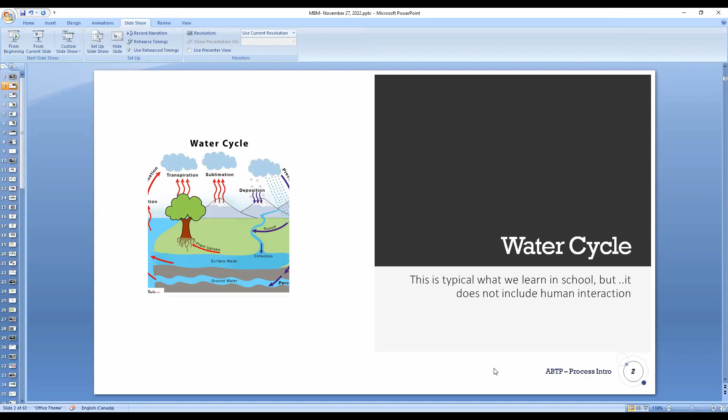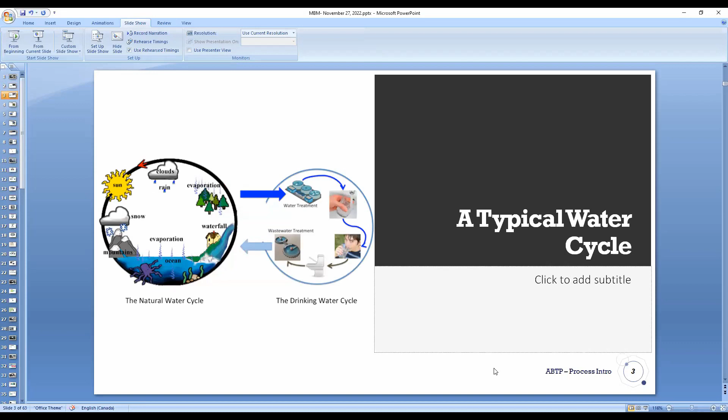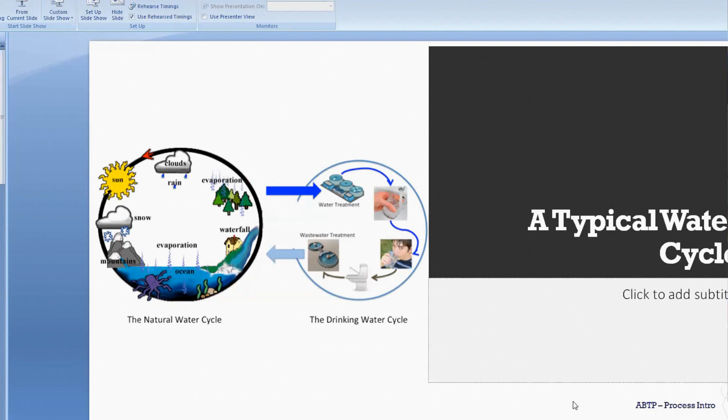And then the human intervention came in, and that human intervention was basically purifying the water and then using it. So you purify the water, you remove the pathogens from the water, you drink it, and then whatever you have consumed, you excrete it, and then it becomes wastewater. And that journey of wastewater continues, because the wastewater gets treated, and that goes back to the lake again.

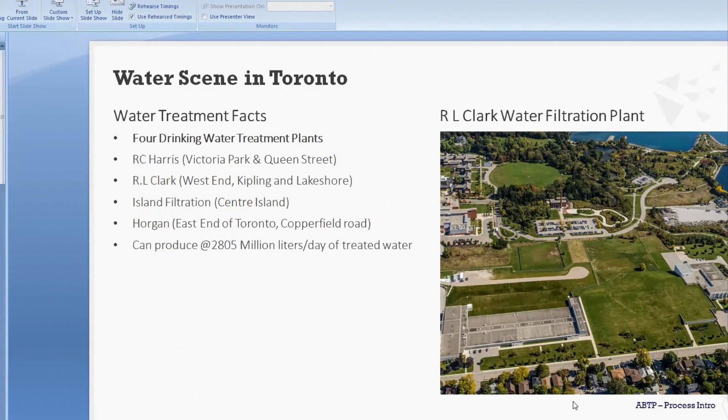So as we live in the city of Toronto, what is the water scene? The city of Toronto is blessed with an abundant supply of sweet water reserve, which is Lake Ontario. And all the water treatment plants in the city of Toronto are along the lake lines. The first is RC Harris, which is at Victoria Park and Queen Street. The second one is RL Clark, on the west end of Toronto. The third one is Island Filtration. The fourth one is at Horgan.

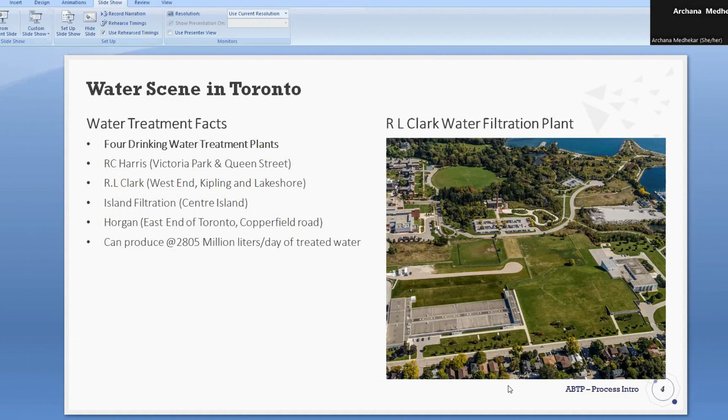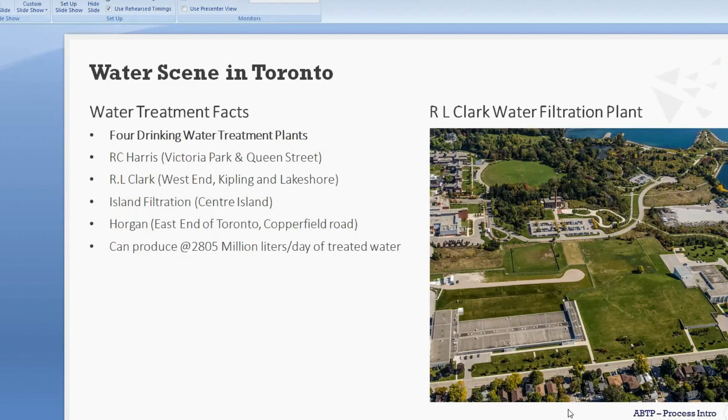The combined treatment capacity of all these water treatment plants is around 2,800 million liters a day. The plants do not produce that amount of water each day, but they are rated to produce that amount by the ministry, because water treatment in Canada is regulated. The ministry issues you a certificate of approval, also called environmental compliance approval, ECA, to produce a certain quantity of water of a certain standard.

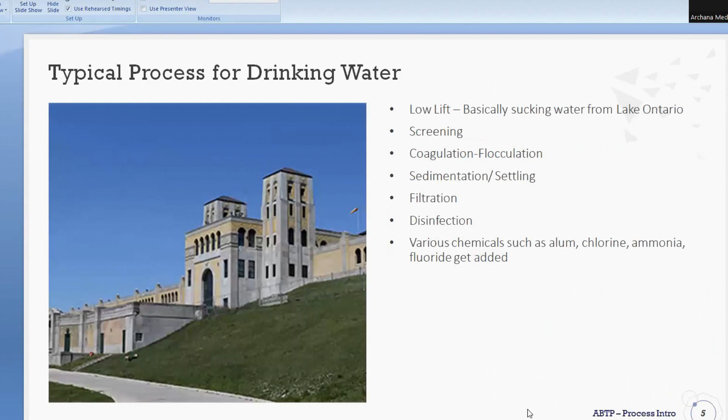So what is the typical process of water? It takes the water from the lake, then you screen it. Water is basically an amalgamation of many ions. So you add some chemical to it, such as alum, which goes through a process of coagulation and flocculation. You're basically destabilizing the ions. Destabilization leads to coalescing of all those particles to form bigger chunks, and those bigger chunks settle down, and that's the process of settling.

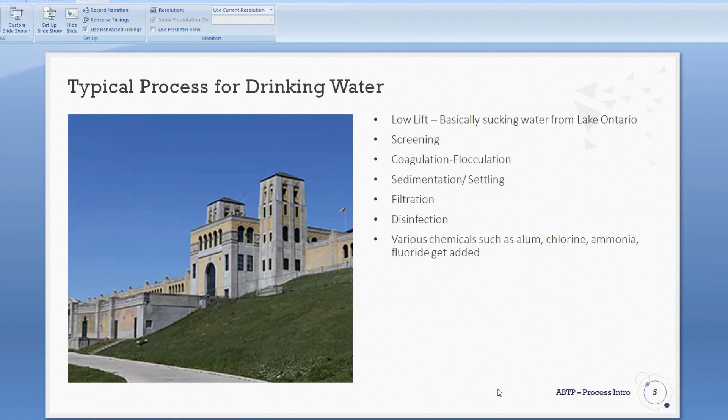Then it goes to a process of filtration, and the filtered water is disinfected because it still has certain pathogens such as E. coli, and then it comes to us through various different lines. In the picture you can see one of the biggest water treatment plants in Canada, the RC Harris treatment plant, on the east end of Toronto.

From that pumping station it goes through a process of screening, which removes the bigger material. What kind of bigger materials? I have seen 2x4s or pieces of tires, or the worst one I have seen so far is somebody dropping in a filing cabinet. Then I have seen bills coming into the wastewater facility, somebody's lost wallet coming into the wastewater facility. So that is called preliminary treatment.

Then it enters the primary treatment. What happens in primary treatment? It contains your pee, your poo, and a lot of water. The poo particularly is what we call solids. The solids basically settle down; that is called sludge. And that sludge is pumped out to a process called a digester. What is a digester? Nothing but a monster stomach.

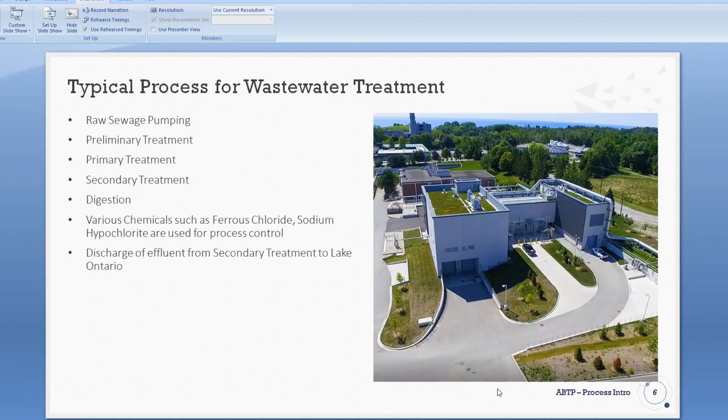And then the water passing over from the primaries goes to secondary treatment, where bacteria eat whatever organics are remaining in the water before sending a very clear product to the lake. So this is a typical process. The effluent from secondary treatment goes straight out to the lake, which is Lake Ontario.

There are, again, 4 wastewater treatment plants in the city of Toronto. One is the Ashbridges Bay treatment plant, at Leslie and Lakeshore, one of the largest. The second one is Highland Creek. The third is Humber treatment plant, on the west end of Toronto. Many of you must have traveled on the Gardiner, around the Queensway area. On the right side, you would see a big green building. That's the Humber wastewater treatment facility.

And the fourth one is North Toronto wastewater treatment plant, which is in the O'Connor Drive area, within the ravines of Don Valley Parkway. Coming on Don Valley Parkway, many of you must have seen a big elephant on the right side. Right within that area there is a wastewater facility, and that is called North Toronto treatment plant. Combined, all these plants treat around 1,544 million liters per day of wastewater.

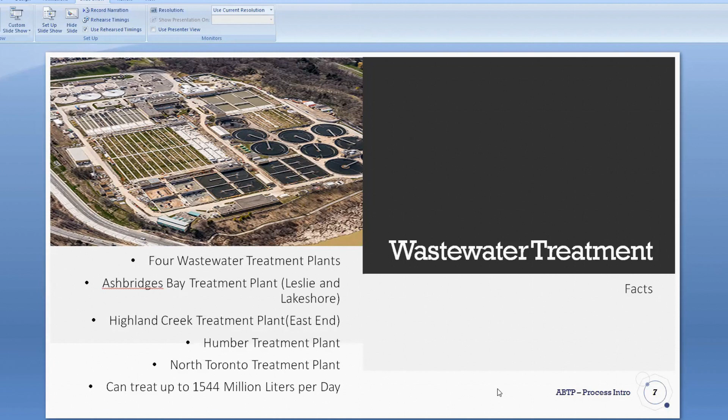So how much do we treat? Ashbridges Bay treatment plant has a sewer shed of around 25,000 hectares. It serves a population of around 1.5 million residents. The rated capacity of the plant is 818 megaliters, and the hydraulic capacity is 3,300 megaliters per day.

Now, all these are big numbers, but how do they relate to you and me, to understand how big they are? Each bathtub in our house holds around 200 liters. The treatment plant, all combined, holds around 5.2 million bathtubs, just to give you the gravity of it. It is also equivalent to 325 Olympic-sized swimming pools. That's the kind of treatment we are talking about.

But do we treat that amount of wastewater each day? Absolutely not. But sometimes we get inundated with water, particularly rainwater or snowmelt, and that's what we call hydraulic capacity. Ashbridges Bay treatment plant is rated for a maximum hydraulic capacity of 3,300 megaliters, which is 3,300 times 1,000,000 liters per day.

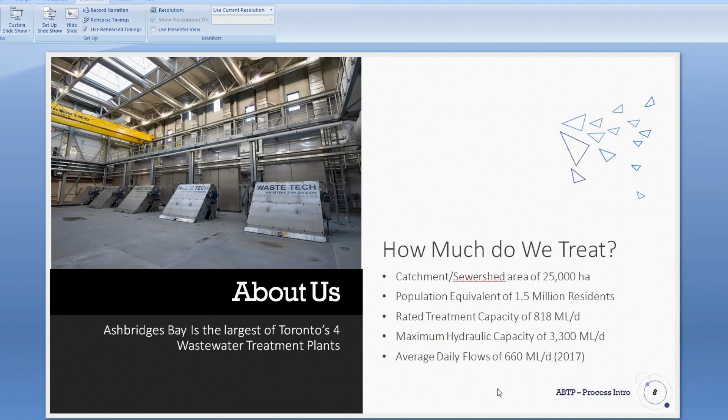The picture you see on the left side is the screening building. That's where all the wastewater first comes in, whatever is pumped, and then it gets screened to go on to the next treatment processes. Ashbridges Bay has multiple raw sewage pumping stations, which I'm going to cover next. So let's talk about it.

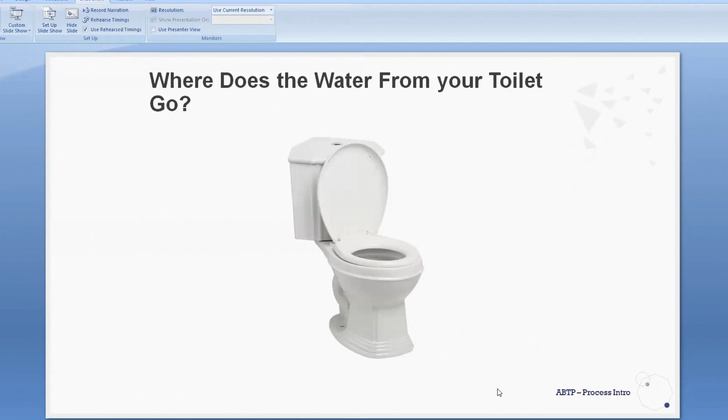As Kaka rightly started, this is the typical toilet we see, and no one wants to talk beyond this point; it's kind of out of sight, out of mind. So, just a bit of history about wastewater treatment. These are the Romans' latrines.

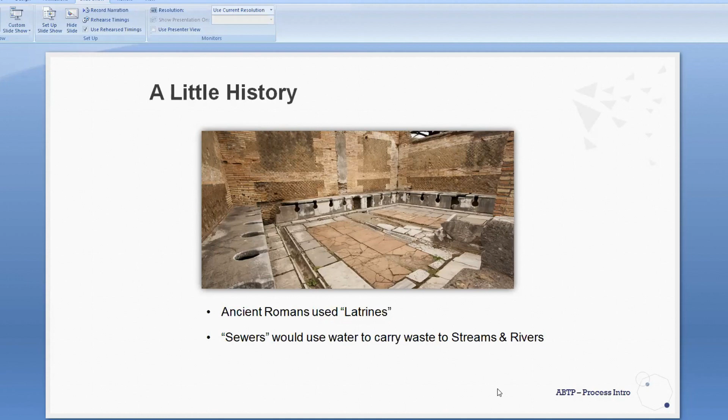And what used to happen with the sewage? It used to go to the streams and the rivers. Unfortunately, this situation is still the same in many developing countries, including India. "Flush the toilet" became a popular terminology in the early 1800s. These are some fun facts, nothing more than that.

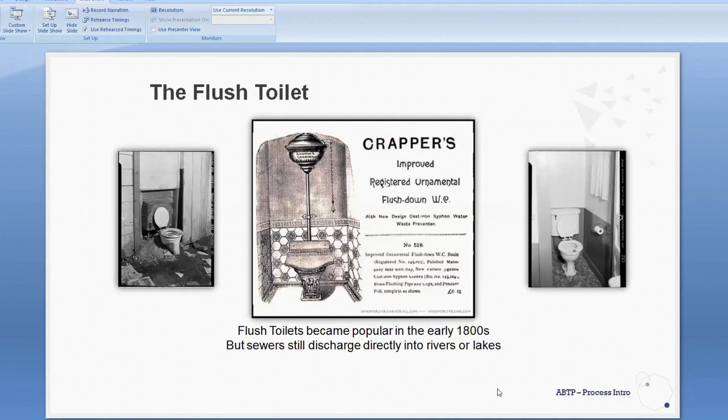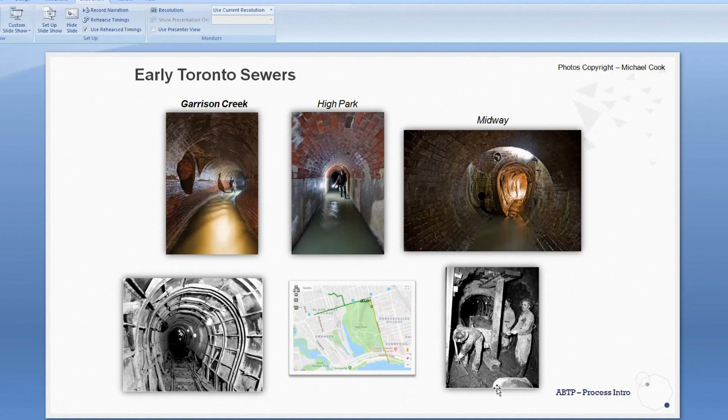Any questions up to this? These are the earlier sewers, the Garrison Creek sewer. As we said, this is the topic no one wants to talk about. There used to be a lot of corruption and incompetence in earlier times, but over time the situation has drastically changed.

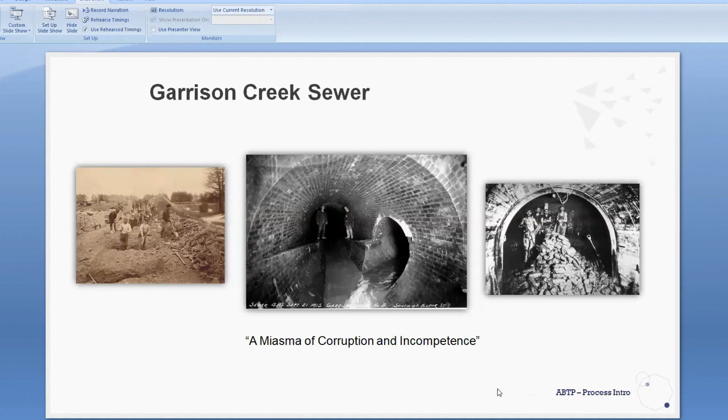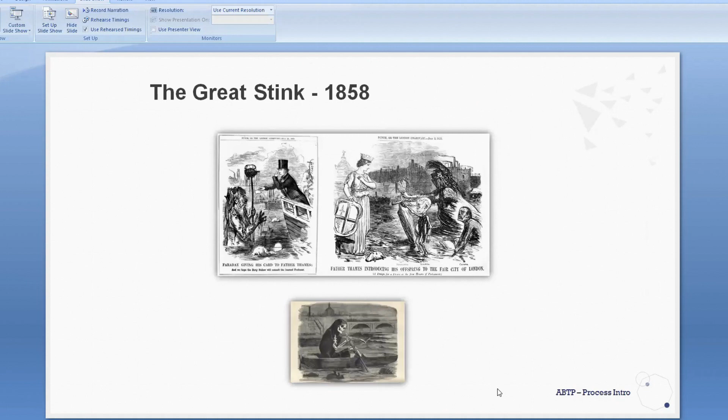When Toronto started developing, the politicians in the city of Toronto started talking about what is a better scheme to treat the wastewater. We were looking at London's interceptor system. The City of London already had the interceptor system by then. So we thought, okay, let's copy London.

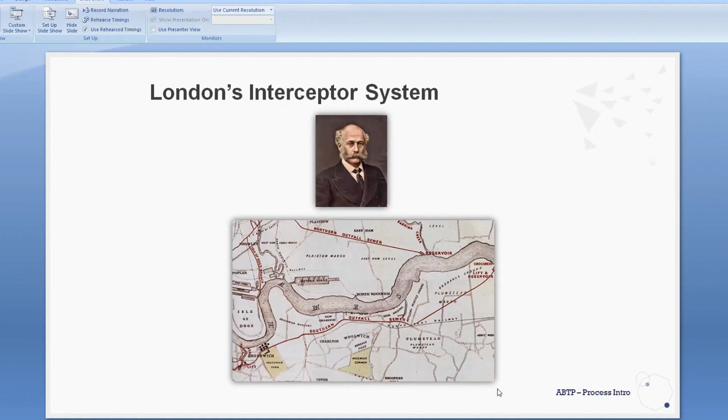So how does an interceptor system work? There are two kinds of interceptor systems. In the first, assume it's a circular pipe bifurcated into two parts. There is a mid wall; on one side the sanitary comes in, that's where our toilet flush comes in, whereas on the other side the storm water comes in.

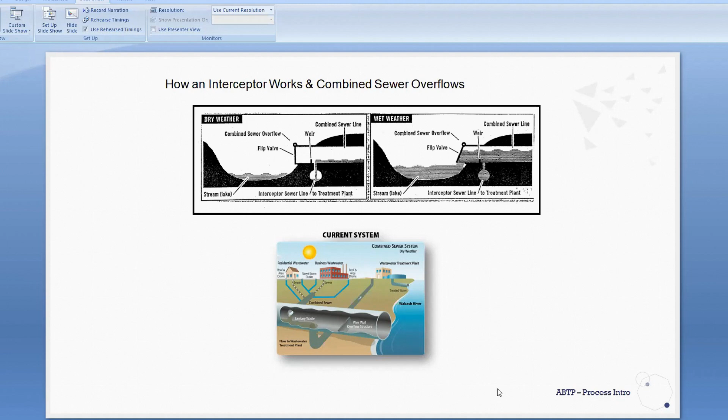Now the newer city completely has two parts. There are two separate lines. They carry stormwater separately and the sanitary water separately. So that is basically what we all call interceptors. So as I said, let's copy London. We started in 1910, the first time we started thinking about it. And very soon we had our first wastewater facility in the city of Toronto, which started construction in 1913.

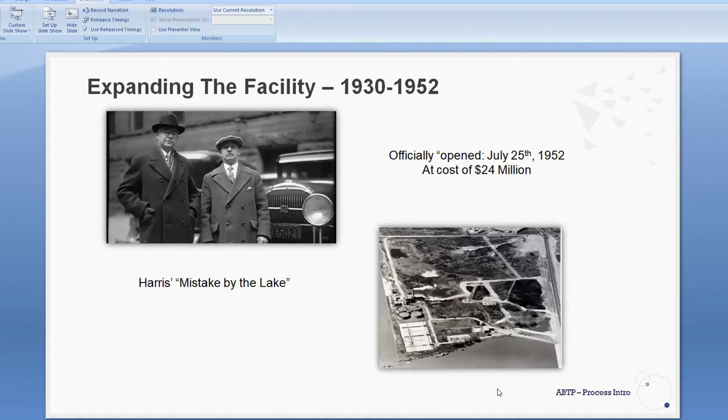But on the right side of this facility, there is a wastewater treatment facility, which is all covered areas. And if you go today or tomorrow, you would see a basketball field on top of it, right? But that is the first wastewater treatment plant we had, which is now merely a pumping station. And that's where the Ashbridges Bay treatment plant started. It has been expanding from 1913 to this day.

So this is the 100 years evolution of Ashbridges Bay. From 1910 to 1913, the design of that first facility started, and since then it has been in construction. The capacity of the original treatment plant was merely 150 million liters, and over time it has been expanded to 818 megaliters, which is 818 times 1,000,000 liters per day. On a given day, we normally treat around 600 megaliters. Today, when we had around 7 to 8 millimeters of rain, the flow the plant is processing right now is around 1,000 megaliters.

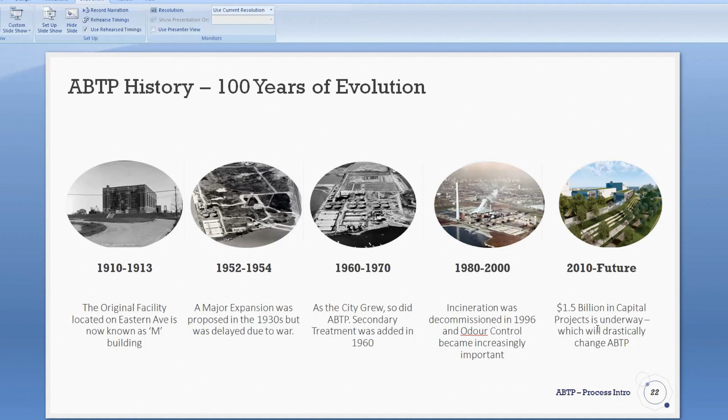So these are the various developmental phases of the facility. During the 1960s and 1970s, as the city grew, we started our secondary treatment system. Then we started incineration, and in 1996 we stopped incineration, and 2010 and the future is basically capital spending of close to $1.5 billion to improve our wastewater. So this is the typical sewershed of the treatment facility. The continuous improvement and expansion led to the current capacity of 818 megaliters, which is approximately 320 Olympic size pools.

Within that, you would see a gray area. That's what is taken care of by the North Toronto treatment facility. Now, on the west side, there is another wastewater facility, the Humber treatment plant, which is again just near the lake. So this is the complete sewershed of the wastewater scene in Toronto. So along the way, does all water come by gravity? Absolutely not. There are approximately 84 pumping stations at strategic locations, which basically pump the wastewater out to the sanitary sewer.

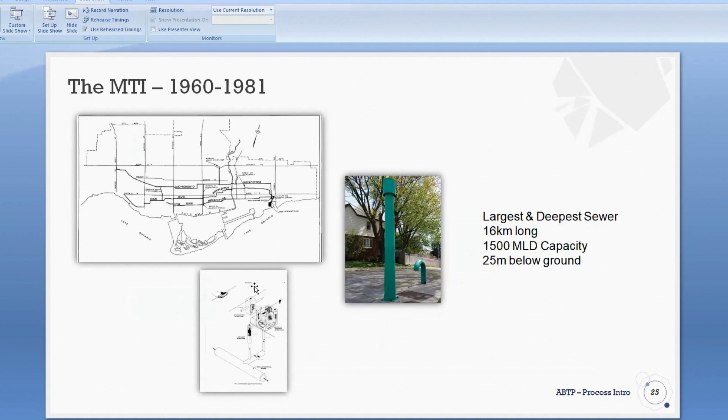So the sewershed, as I said in the previous photograph of the North Toronto. Now, the oldest wastewater treatment facility in the city, as I said, was constructed in 1913, and we call it the M building. Some people might ask me why we call that the M building. I really don't have a clue. But the buildings in Ashbridges Bay, instead of by names, one is called the M building. Maybe the only reason I can think of is because that is called the main treatment facility, and that's the reason M came in.

But below the M building is the T building. This is a circular structure. Again, you would see it on Coxwell and Eastern Avenue. If you Google it in your spare time, you would see amazing pictures taken at night of this site, which is the T building. And the third picture is the Coxwell sanitary trunk sewer, which starts at O'Connor Drive, bringing in the wastewater from the sewershed all the way to Ashbridges Bay.

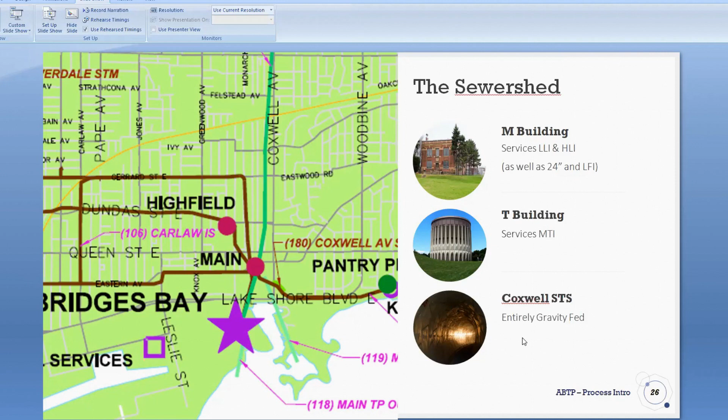So this is a facility which is a raw sewage pumping station, the M&T building, as we fondly call it, which brings in the water from the Coxwell sanitary trunk sewer. And then there are additional tunnels which bring in the water. One is the Eastern Beaches Tunnel, which brings in the water on the eastern side of Lakeshore.

Then Ashbridges Bay has two preliminary treatment trains. One is called the D building and one is called the P building. Again, no reason why it is D or why it is P, these are just the names. Then it has a common secondary treatment facility. So the M, the D and the P building, which are the preliminary treatment facilities, are located here. Where my mouse is moving right now, that's where the P building is. And on the left side, that is the D building.

Towards the end, I'm going to show you a bird's-eye view. I have some drone photography to give you the mammoth scale of the facility. So this is the secondary treatment plant, which takes whatever comes from the P and the D building to the secondary treatment facility, where bacteria consume it before sending it out to the lake.

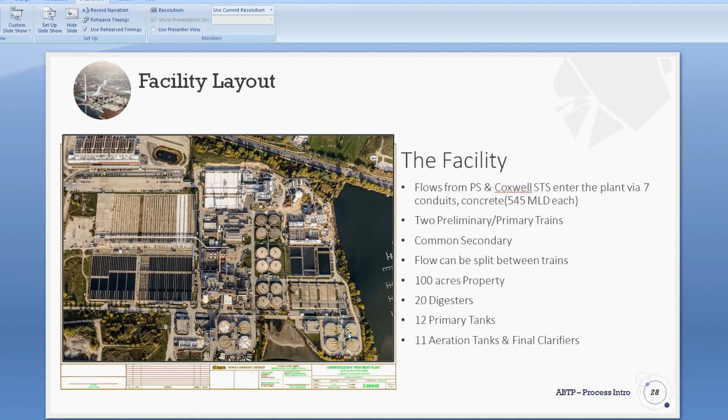So what does wastewater contain? It contains suspended solids. Then the organics, the organic load or BOD. Then there is ammonia, which is by virtue of our pee. Then there is phosphorus, and there are dissolved ions, the salt we eat.

One of the funniest things we have noticed is that you could see on the screenings in a wastewater treatment plant the impact of corn on our lives. I don't have the pictures over here, but when games are happening, you could see how the flows come in because people are going to the bars. You would see an increase in flow when there are games going on. You could see these kinds of patterns in the wastewater facility.

Same thing, many of you must have seen it. When COVID started, they started sampling wastewater. That gives you early signs of where the next outbreak of COVID could be coming in.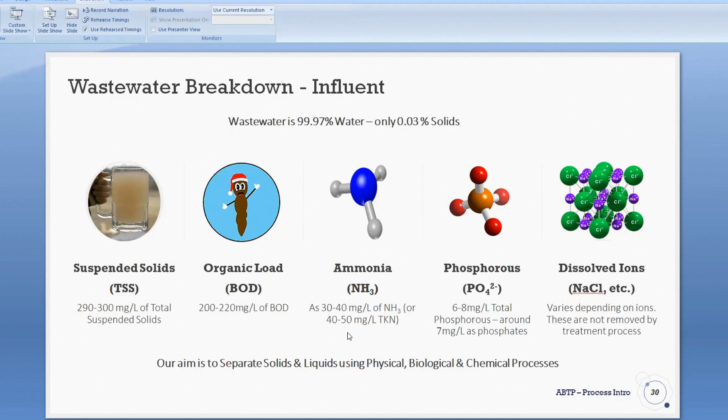What happens in the liquid stream is the wastewater comes in, it gets screened, then you primarily treat it. Then it goes through the secondary treatment process. Then it gets disinfected. Basically, you are killing the pathogens using chlorine, that is, sodium hypochlorite. Earlier, we used chlorine gas, but now we use sodium hypochlorite. That's the disinfection process before we send it back deep into the lake; around 800 meters offshore, the water is discharged into the lake.

Now, what happens to the solids? The solids are pumped to something called digesters. The process of digestion produces biogas, which we also call digester gas. That digester gas is used to heat water for hot water applications or to keep the buildings warmer. So we self-consume all the digester gas, particularly in the winter season. In the summer season, unfortunately, we have to take natural gas from Enbridge to keep things running.

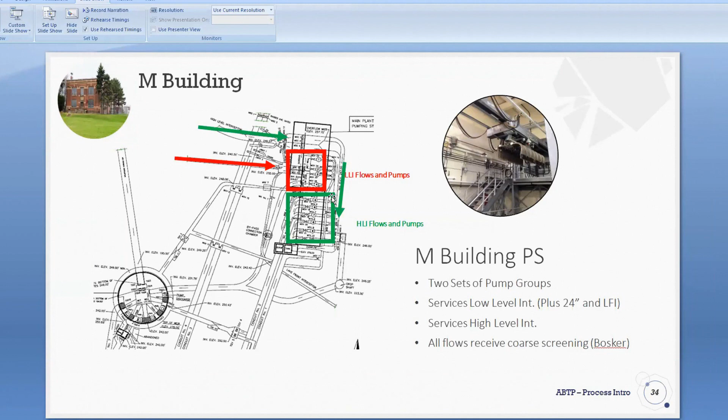The upgrades came on the other side, on the south side of the lake shore. In the 60s, the Mid-Toronto Interceptor, a 25-meter deep, 3-meter diameter trunk sewer, was built, which takes the wastewater and brings it to the Ashbridges Bay treatment plant. The capacity of the Mid-Toronto Interceptor is around 1500 megaliters. The wastewater is pumped by 5 monster pumps, each rated for 1500 horsepower motors.

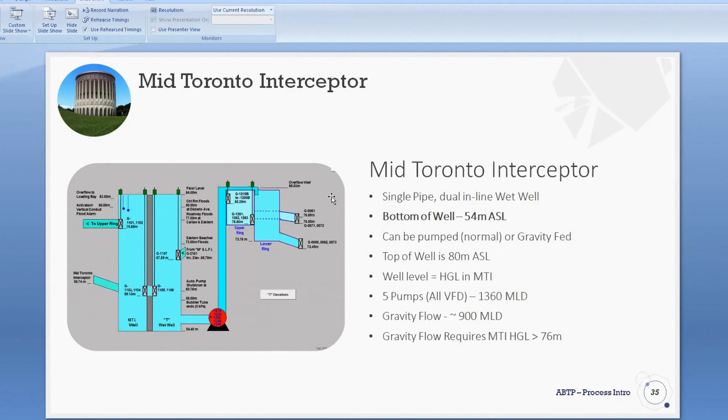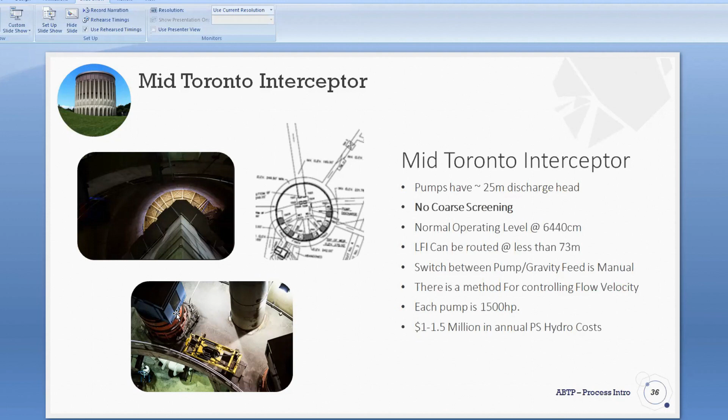These are some pictures of the T building, which is a 65-meter deep building at the intersection of Lakeshore and Coxwell, northwest corner; you can see both buildings. It's pretty deep, around 65 meters, and on the left side is one of the pumps, the motor of a pump. This project was done by Jacobs, or CH2M, in the 70s.

So in the liquid stream, what is the purpose of the preliminary treatment, or screening? Basically to remove the rags and floatables, 2x4s, tires; everything gets removed. It is nothing but a screening process. There are 6mm holes on the screens, and the water goes through, but all the solids get deposited. In the picture on the left, these are typical screen panels, and you can see the corn kernels on them.

So this basically tells you the impact of corn on our lives. It's being used as an additive in almost everything.

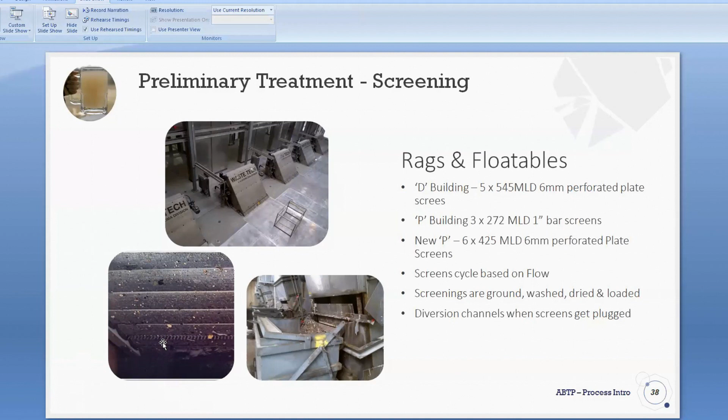The wastewater also contains a lot of sand, because with construction, people sometimes dump sand, or when the rain starts, it takes away the soil along with the sand. It goes to the sanitary sewer and ends up here. These are basically inorganics, additives which get added to our wastewater, and you need to remove them. We call them grit, and the grit is removed as part of the preliminary treatment processes.

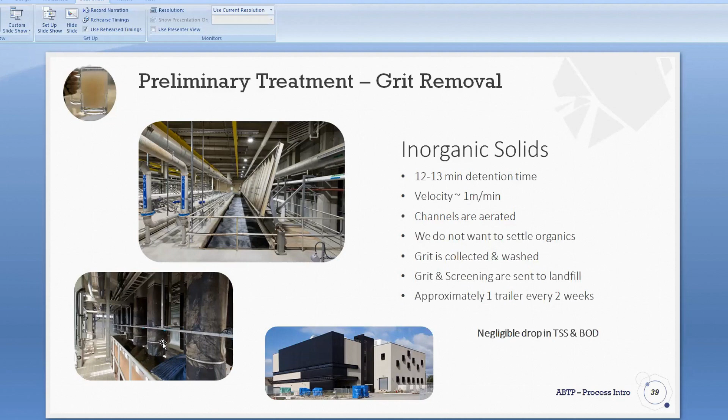Then right over here, you add a chemical called ferrous chloride, which is an acid, to control phosphorus, because the ministry governs what level of phosphorus is expected before you send the effluent back to the lake.

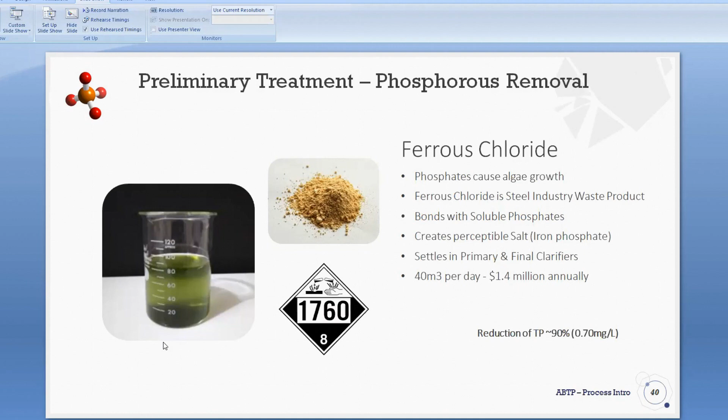The organic solids, the poo basically, along with whatever is in the water, settle out in the primary treatment process and are pumped to the digesters. This is a typical primary tank, approximately 96 meters in length, 36 meters in width and around 6 meters deep. We have around 18 tanks, 6 plus around 12 tanks of these sizes.

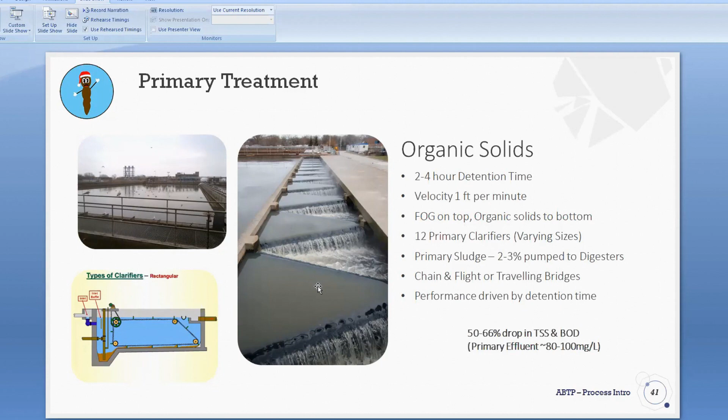We have 11 of these tanks at Ashbridges Bay Treatment Plant. These are all covered tanks. When I'm moving my mouse, these are all the covered tanks.

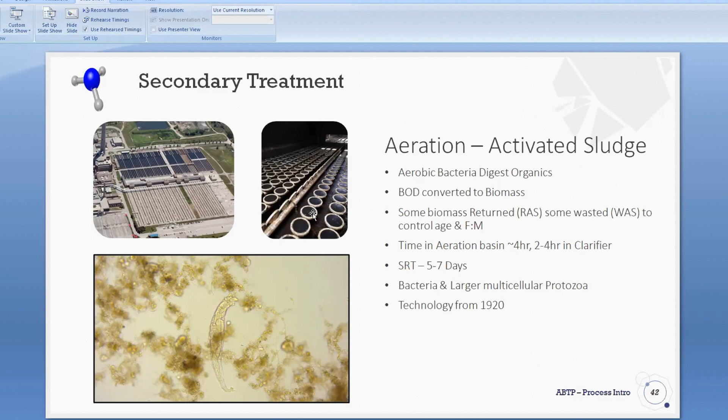Bacteria eat away all the organics, and whatever water remains, which is much cleaner, is sent out to the conduits for further disinfection. So the aeration system consists of aeration clarifiers. Each tank is rated for around 91,000 cubic meters per day.

Then the flow, whatever solids which have been eaten away by bacteria, are taken to the digesters for further treatment.

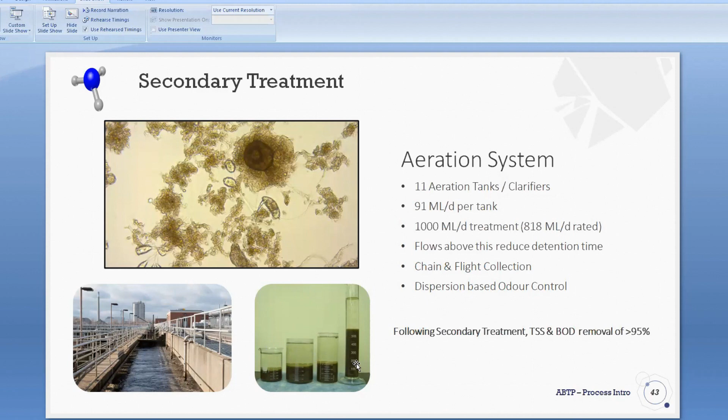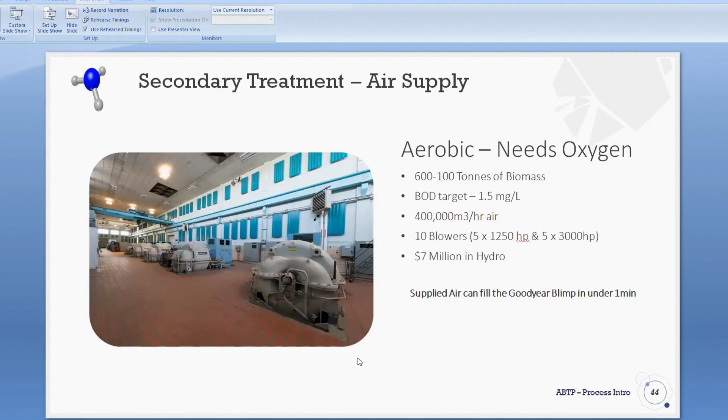So secondary treatment, washout, and bypasses. I'm sure this is one topic which is near and dear to a lot of people. Occasionally we have bypasses, particularly when we get inundated with a lot of water or rain. As I said, the plant is rated for a certain capacity, so what do you do with the wastewater still coming into the plant? Unfortunately, you have to bypass it. So it is treated with chlorine, disinfected, and then sent back to the lake.

So the City of Toronto has something called a flag program. People who go to the lake quite often must have seen it. The colors of the flags do change. When the color is red, that's basically a sign that you shouldn't go in the lake and swim. But when the color is green, you can go and take a dip in the lake. That flag program gets affected by the bypasses occurring in the wastewater facilities. But the bypass is always a treated bypass.

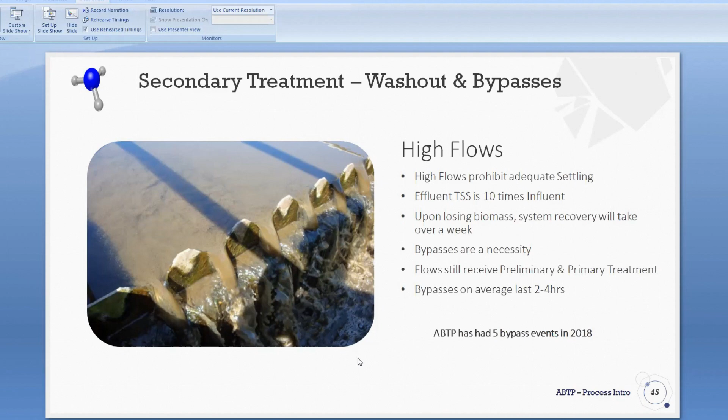So the wastewater coming out of the secondaries still has bacteria, basically E. coli, which can cause dysentery. You kill those pathogens by adding sodium hypochlorite to it and maintaining a certain contact time.

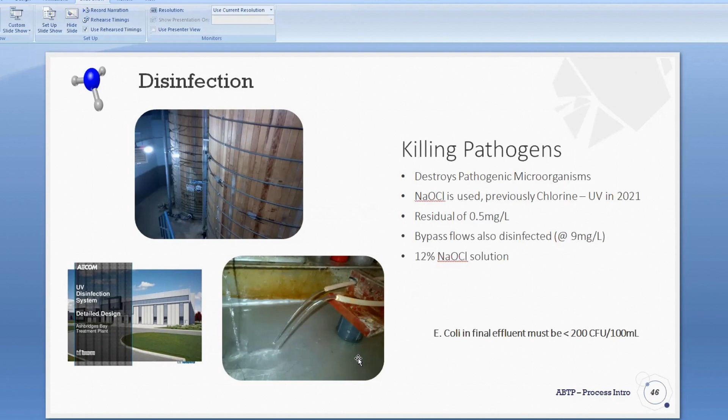So the solid stream consists of the digesters, then the dewatering facility or the centrifuges, and the pelletizers. The retention time in each digester is around 15 days. All the solids which come into the plant are retained for 15 days. So they are stabilized, and biogas is produced from it, which is used in the plant itself.

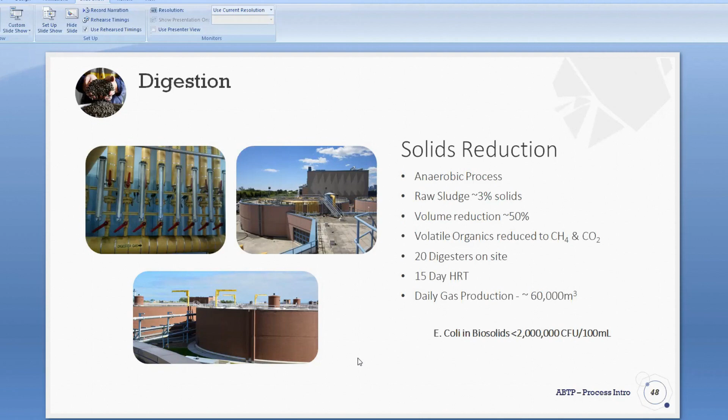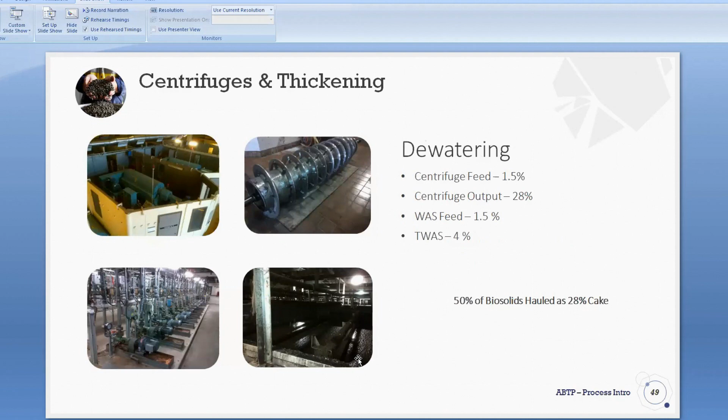So the biosolids which are produced in the wastewater are concentrated to 28% solids now. You convert those 28% solids into pellets, and those pellets are used as fertilizer. The pellets are dried to around 94% solids, and many of you must have seen it as a Nutri-Pill label sometimes in Canadian Tire — that's the organic pellet which is from Ashbridges Bay most of the times, as a Nutri-Pill.

And it's a facility which is currently operated by a French company called Veolia.

This is a typical process. We treat around 150,000 wet tons of biosolids annually, out of which around 84,000 wet tons are converted into pellets by Veolia, whereas the City sells the remaining 70,000 wet tons to different farmers. There is commercial farming happening in the London area or in the Kingston area, and they take a lot of biosolids from us. Everything goes for beneficial use, for agricultural purposes, processed into a fertilizer, or for soil conditioning product. None of it is sent to landfill.

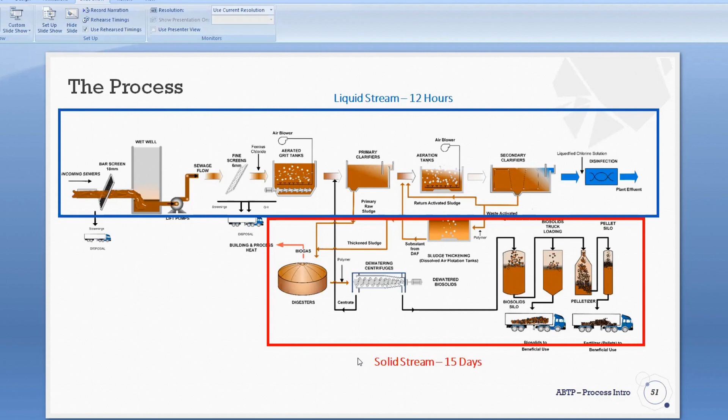This is an interesting slide, I always love this slide. On the left side are the influent, the wastewater coming into the plant. It has suspended solids around 280 milligrams per liter, and the effluent, which goes back to the lake, is around 5.4 milligrams. So the reduction in solids is 98%. The biological oxygen demand, or the organics loading, is around 202 milligrams per liter, and what goes out as effluent is 4.1 milligrams per liter. Whereas total phosphorus, TP, is 6.4 milligrams per liter coming in, and what goes out is 0.7 milligrams per liter.

In 2017, we had around 7 bypass events, totaling around 1,570 megaliters. As you know, 2017 was a year when we had a lot of rain, where the lake water went up.

So how the lake level is connected to the wastewater facility is we have combined sewers. At combined sewers, there are strategic locations, and combined sewers have overflows, and those overflows go back straight to the lake. So when the lake level went up, the lake started coming into the collection system, and at Ashbridges Bay, we started treating lake water again.

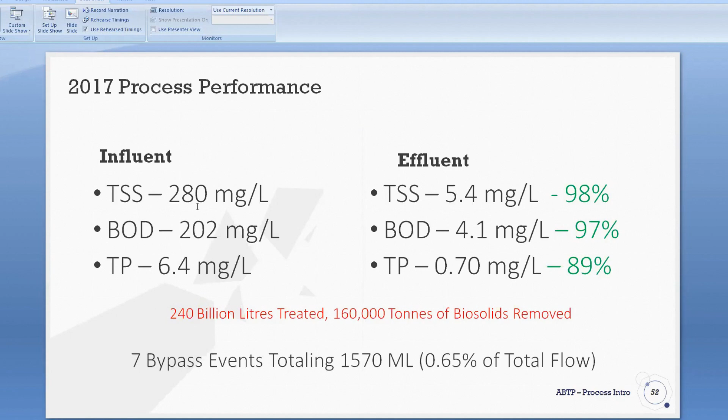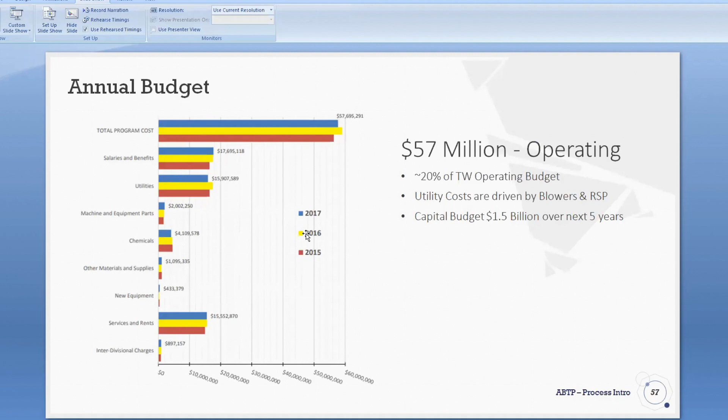So what happens now? Everyone would ask me, okay, what happens with the stormwater? As many of you must have noticed, over time there is more and more urbanization of City of Toronto. The area where there used to be soil is now covered with concrete. There used to be roads, the roads are now paved. So what happens when urbanization is happening?

Earlier, when there was rainwater, the rain would have an opportunity to get absorbed in the soil below. But now it's not happening, it's running off to the wastewater facility, and along the way it carries all the solids, all the leaves, or whatever is on the way, out to treatment facilities such as Ashbridges Bay. This is basically stormwater carrying all the solids. Now, the combination of heavy rains and hard surfaces means more water reaches the storm system. Earlier, that never used to happen.

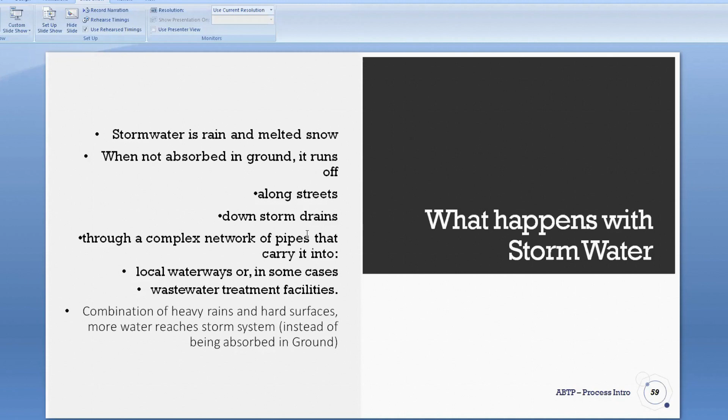So what can I expect from you? Do not push, flush, or put any of these products down the drain. Many times you buy products which are basically written as flushable, but those are not flushable. The baby wipes are an interesting example. If you go to Costco and buy baby wipes and it says you can flush it, no, you cannot, because they basically blind the screens. Hygiene products, condoms, wipes should not be put into the toilets. Fats, oils, and cooking grease, this is not a problem particularly for households, but there are so many restaurants which put a lot of cooking grease back into the system, which binds or blinds the treatment system.

Then there's household hazardous waste, including paint, pesticides, and cleaning products, which should not be put into the wastewater or flushed down the toilets. Same thing with medication, including pills and liquids. There are completely separate facilities which take these kinds of hazardous materials. If you go to Toronto's website, you would find out who takes household hazardous waste and paint. For example, people living in the downtown core near Ashbridges Bay treatment plant, there is a waste hazard depot where you can dump whatever paint you have, and they won't charge you a dime. Same thing on O'Connor Drive, there is a waste hazard depot in the Bermondsey area; they will take your product and not charge you anything.

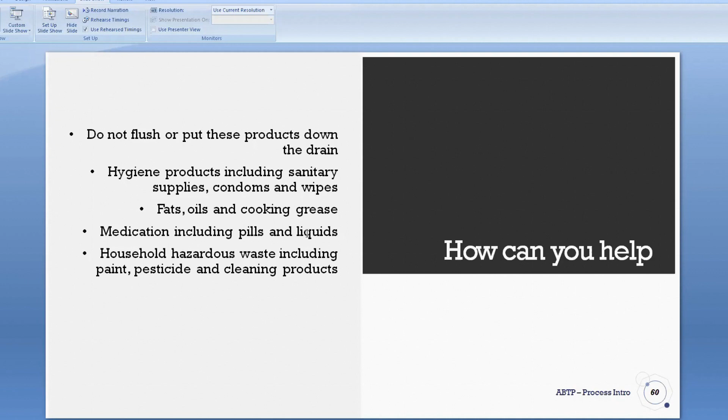Now I'm going to talk about the future of wastewater, where the close to $2 billion will be gone, for treatment of basically the water quality. The next future is towards the treatment of storm water.

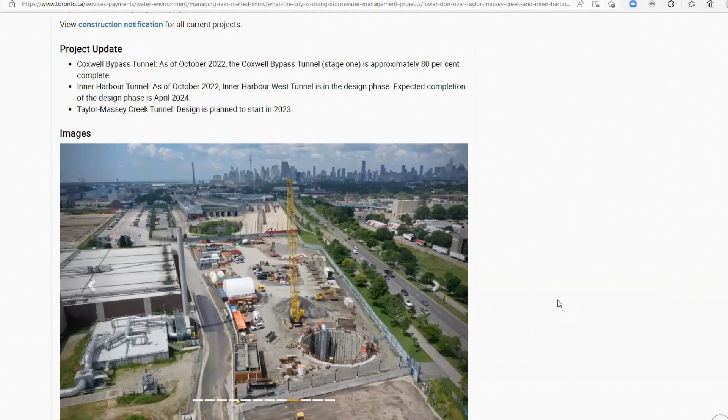So this is the future of wastewater treatment, or where the $2 billion would be going. There will be a lot of projects in treating the storm water. This is a photo of a tunnel boring machine, which is creating an underground infrastructure where the wastewater, the storm water, would be stored and then slowly discharged for treatment.

This kind of system is extensively used in Europe. These are the underground tunnels which the City of Toronto is building right now.

So if you go again into the same area, which I would suggest you to drive by, there is artwork. Local artists who live in the area were given an opportunity to present their art on the structures of the wastewater facility.

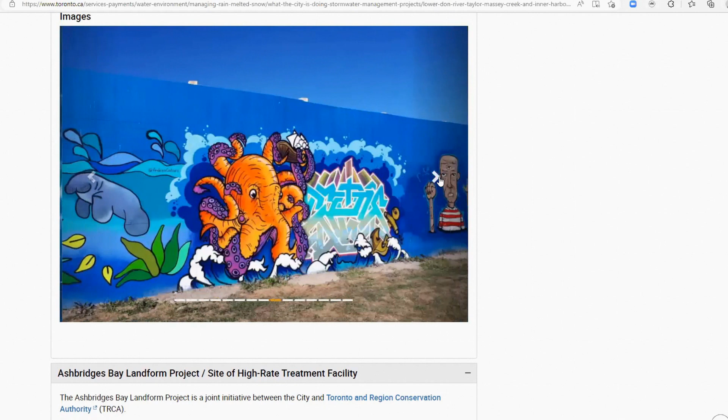So this is the artwork of the local people, and this is the integrated pumping station, which is in construction right now.

So this is the M&T building. The circular building is the T building, and the rectangular building, which is the 1913 facility, is the M building.

So this is the construction at Ashbridges Bay facility. This is around 65 meters deep shaft, which is being constructed right now.

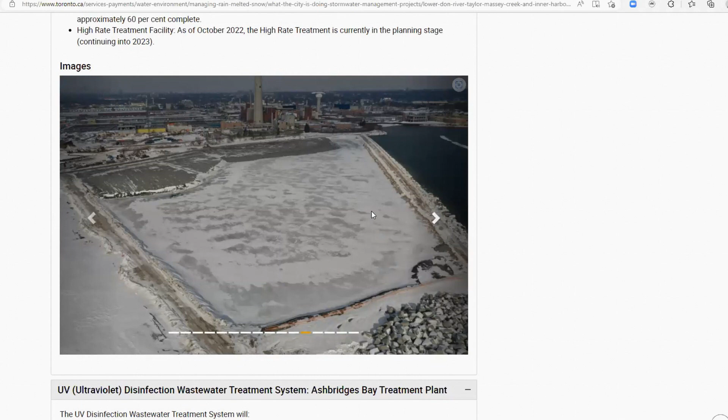The other project is the landform, basically reclaiming the land from the lake. So the facility is here, and this is all the reclaimed land from the lake. Whatever tills or excavated soil from the shafts within the City of Toronto has been dumped over here to create the facility for the next high rate treatment facility, which is going to treat the storm water.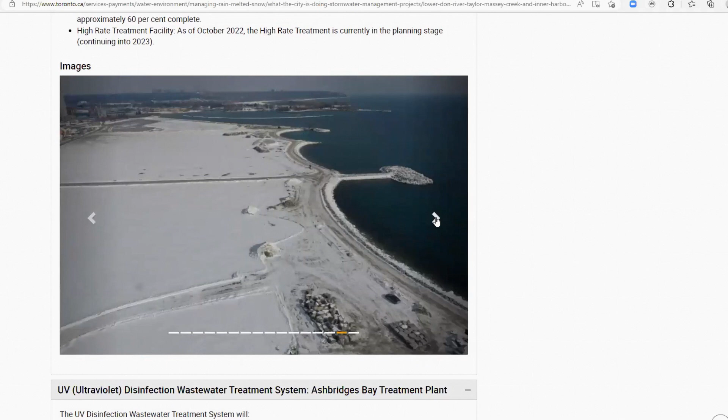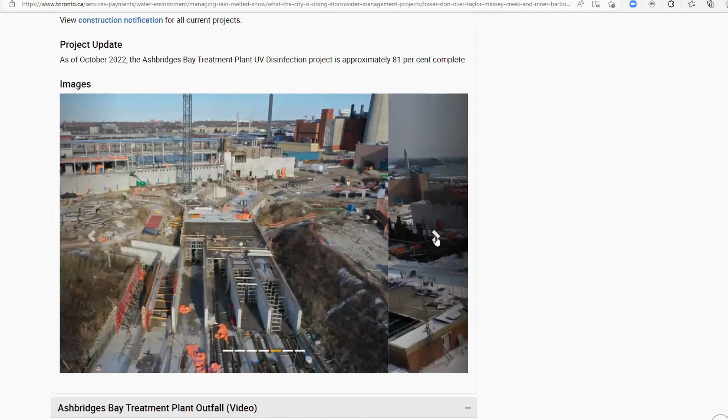Then over time, we are going to stop the use of sodium hypochlorite or chemicals for treatment, and the effluent water coming out of the secondaries would be disinfected with UV, that is ultraviolet light. So this is a construction of those facilities.

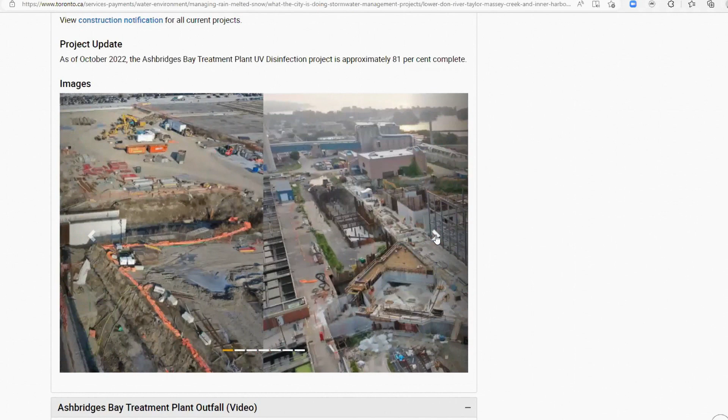So this is where our tax dollars are going. Now I'm going to again stop sharing the screen, and I will show you a drone footage of the current facility.

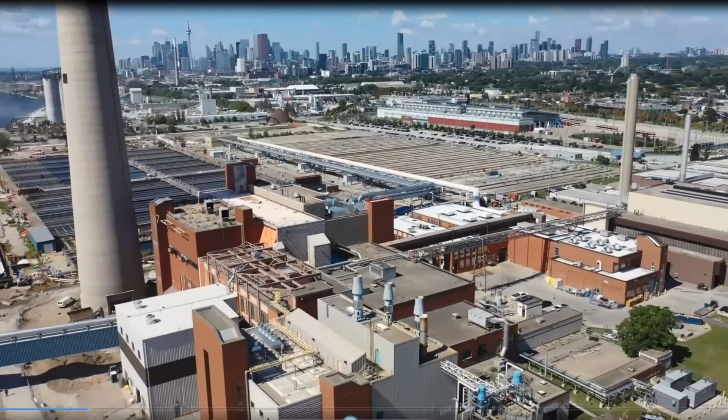So this is the current facility. These are the final tanks. These are the digesters. And this is all the reclaimed land from the lake.

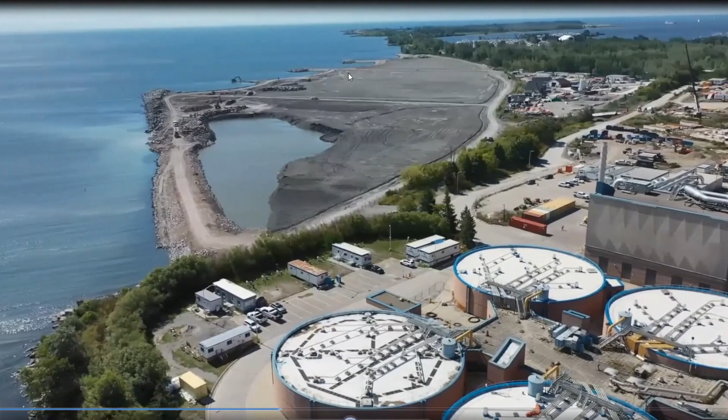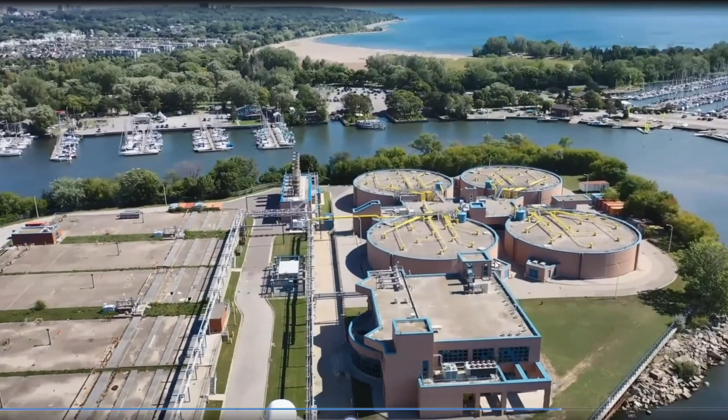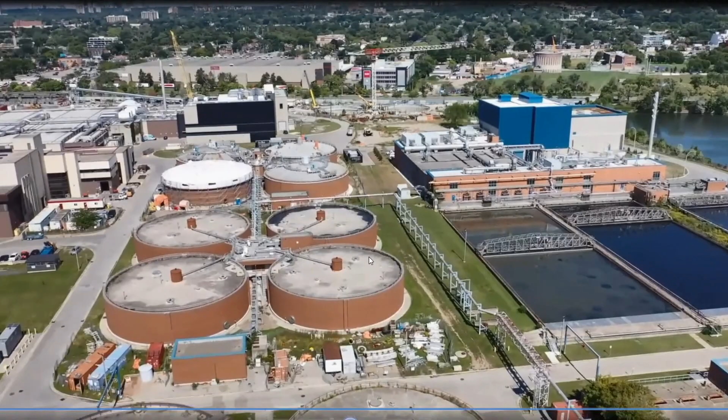These are the primary tanks. Some are covered, some are not covered. Now this is probably the last movie I'm going to show you, which is again on the City of Toronto's website.

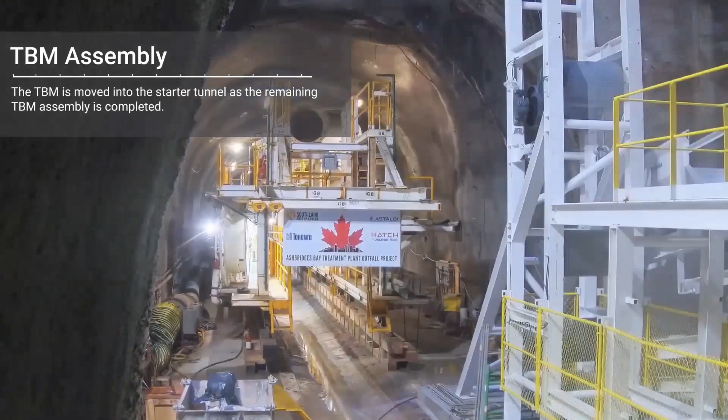Now, all these big projects haven't been completed by the people who are currently working. This is years and years of preparation in place. Many people have worked and retired over time. So what is Marathi Mandir's contribution to it?

I'm sorry, I'm going to take some names. Some of the people are present here. Madhu Bide is one of them. Many of us know Madhu Kaka, as he is involved in many of these projects. He built the electrical substation at Ashbridges Bay treatment plant, which is one of the massive ones.

Same thing with Abhay Tadwalkar, many of you may have heard of him. He was involved in the development of these projects. So was Vijay Ratna Parkhe, who was involved in the development of bylaws, which determine what needs to be sent back to the treatment system.

And there are currently some people who are still working. As a matter of fact, Archana Medekar looks after all the training given to the treatment facility. Then there's Mukund, who is another guy. These are the Marathi people who were involved in the development of all these facilities.